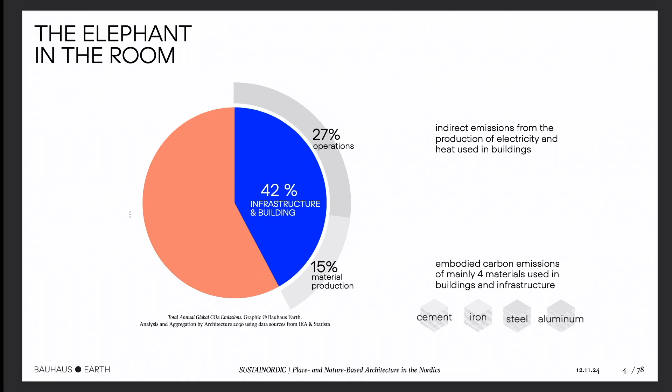We're failing to get to the desired goal, and we have this elephant in the room where we know that the built environment is responsible for a great deal of emissions, and specifically 15% of these emissions are embodied in 4 main materials used both in buildings and infrastructure: cement, iron, steel, aluminum.

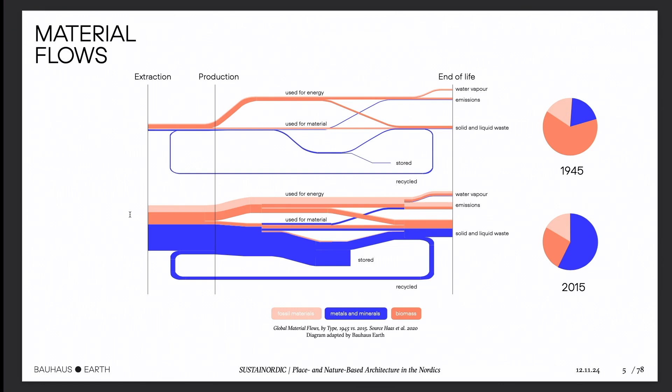We also talked about this before, how in the last 70 years, through this process of the great acceleration, we have shifted our material flows from biomass-based to metals and mineral-based. And so we have not only exacerbated the consumption, but also changed where these materials are coming from.

And if we move a bit backwards, then we realize that our built environment is just a piece of our history within the time that Homo sapiens have been inhabiting the world. And even Homo sapiens is nothing compared to all the time that the first humans lived here. And human existence is minuscule when we look at it in the grand scheme of things, understanding when the materials that we are currently using were actually created by the Earth.

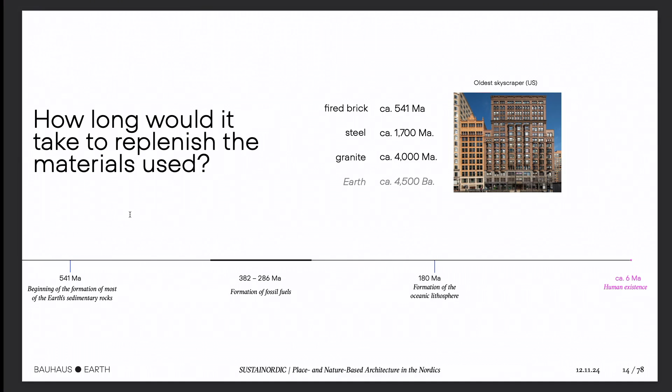And as was also mentioned before, the formation of the oceanic lithosphere or fossil fuels or all these sedimentary rocks that we use mostly in cement took 500 million years. So if I ask you again, is this building old? How long do you think it will take to replenish the materials used here? Well, at least 500 million years, but also the granite, it will take 4,000.

So what we're doing here is tapping into slow carbon cycles, and these carbon cycles take too long for us to even grasp how long that is. We're talking about steel, concrete, or plastics that, yes, of course, we treat as long-lasting and durable materials, but actually the life expectancy of these materials in our current built environment is very low. And the potential for recycling is very limited because of their energy-intensive process.

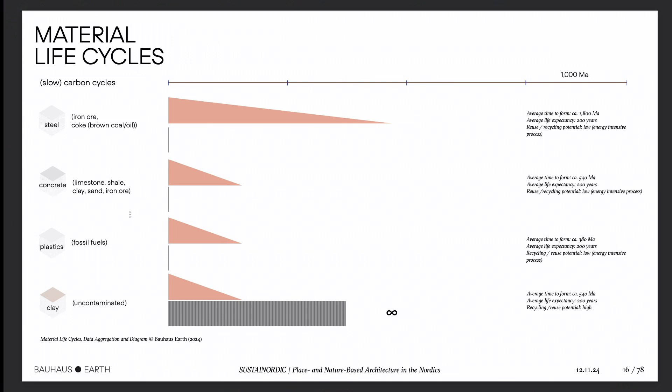And to this I add clay as a separate point because, as we have also mentioned before, as long as it's not fired and it's uncontaminated, the potential for reuse is practically infinite. So again, we look at these things and they say, okay, these are durable materials, this is why we have been shifting towards this use.

Why? Because we build for ourselves based on our human perception and our needs, and our needs change, and our built environment needs to evolve with us, and that might not change, but we are able to change the way we build.

So this is our vision at Bauhaus Earth. As I was mentioning before, founded by Hans Joachim Schellnhuber, it obviously resonates to you through the Staatliches historic Bauhaus School of Design, where practitioners, teachers, students of various disciplines came together, and they were bringing these radical methodologies of thinking through making, and they were exploring how to bring design to manufacturing post-First World War. So, of course, we take this radical approach, but we now commit ourselves to also address the negative legacy that came out of this historic Bauhaus, which is modernism.

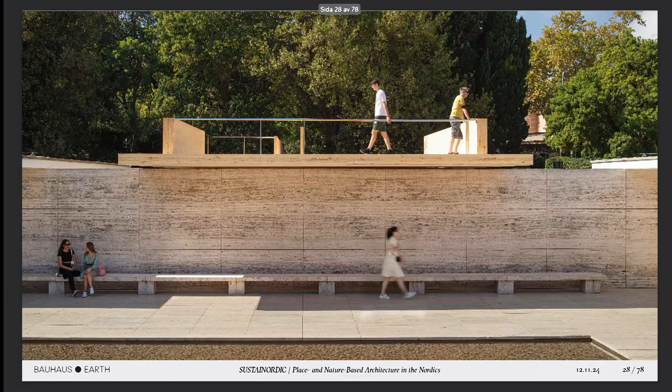We had the opportunity to work with IAAC and with the Mies van der Rohe Foundation, where we collaborated in this temporary intervention of a timber pavilion in the premises of the Mies van der Rohe Pavilion. And we addressed this from the question of what would be the climate impact of building the Barcelona pavilion anew as it was designed versus building it again with local timber. So of course the actual pavilion that was built was just a provocation, but we had a whole exhibition around it trying to answer this question.

And to this we ran an LCA analysis where we broke down both pavilions in different elements that could be comparable, and we tracked the emissions but also the kilometers that the materials used in these elements had to travel to get to the place. And then we made this comparison, and of course we realized that the timber pavilion that was actually built with local timber grown in the north of Spain had a lower climate impact than building the pavilion as it was designed by Mies van der Rohe and also rebuilt in 1986.

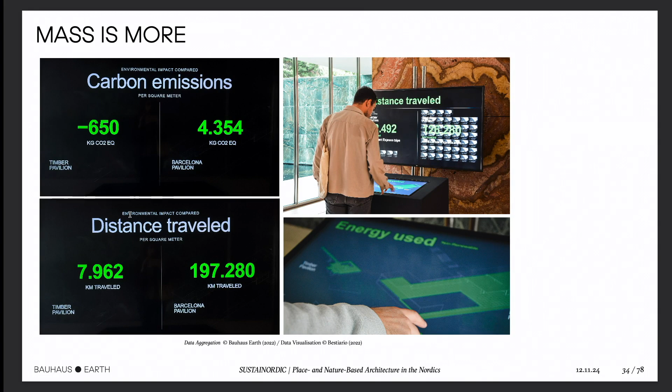But this was not the whole thing. Of course, what do we do with this data? We need to communicate it, because in the end, we need to create this outreach and make other people aware of this. So we collaborated with an agency called Bestiario, who did this lovely data visualization application where people could understand these numbers in a more graspable way. But we also designed these material tags, as we call them, similar to the nutrition tags that you find on food, trying to make the invisible visible. And we very subtly pasted them on every element and building component that was analyzed, so people could just lean towards it and understand the climate impact behind the material that they were looking at.

But not only this, it was also an excuse to launch what we call the Barcelona Protocol, which is a localized vision of our Towards the Re-entanglement, a charter for the city and the earth. I think you can find one of the copies of this, our manifesto, on the table. And we launched this as a localized vision for achieving a regenerative built environment.

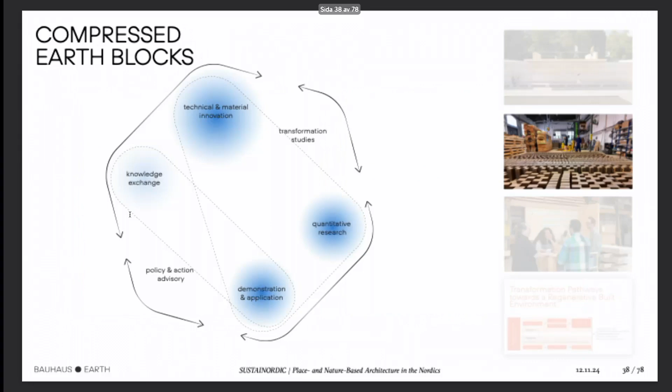Then the second project is compressed earth blocks, because not everything is timber. And in this case, we work locally, addressing the region of Berlin-Brandenburg. Two of our researchers had a previous life experience working with clay in West Africa. They are German, but they were at some point in life based there. And when they were back in Germany doing their master thesis, they thought, okay, what about knowledge transfer? Why don't we bring what we have learned there here? And this was very well paired with the DIN standard that was recently adjusted, actually. So they said, okay, let's do this, but let's make it a bit different.

Let's not take virgin material, but rather tap into waste streams to really see the city as a resource. So they did that. They started with 11 different points, and they tried excavation material, then material from demolition, from old, 100-year-old houses that were built in clay back in the days and then demolished, and also clay as a byproduct from sand mines.

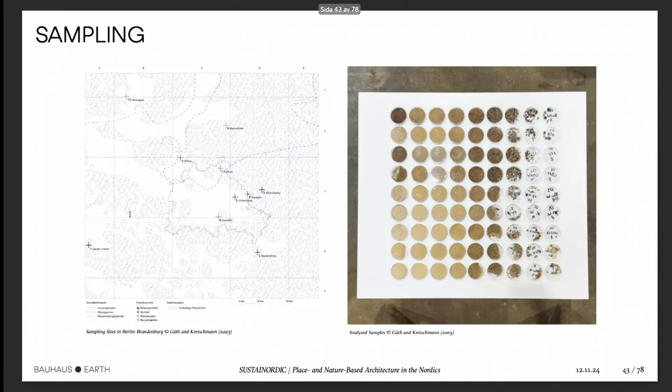After testing, they created this geological framework to first locate where these sites could be found. They conducted these soil surveys that I mentioned before. And then they started to do this sampling from the 11 different sites. So they follow all the protocols established in the DIN. And they found the optimal grain distribution. And through this process, they chose the winning soil sample, let's say.

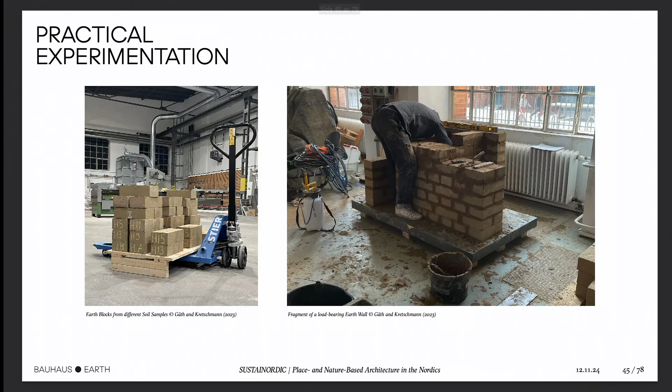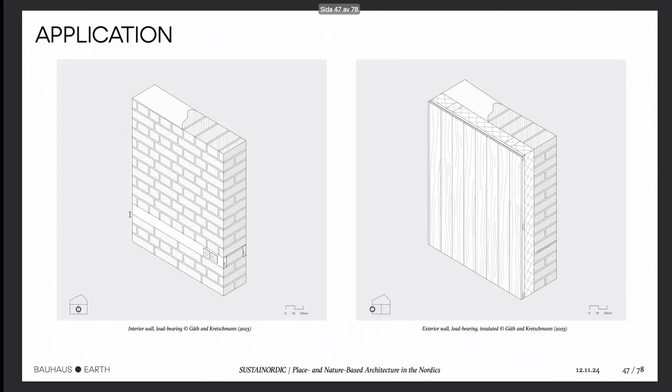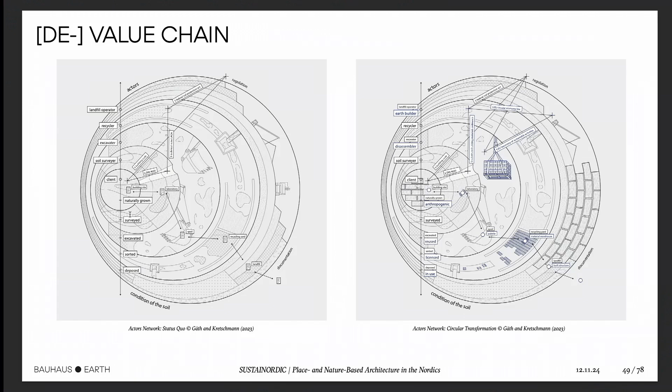And they started the practical implementation of creating these compressed bricks. They conducted all this evaluation, and they came up with some practical implementation ideas. And they managed to license this brick as load bearing. But then the next steps, of course, are going into the value chain, because at the moment, as Jason Moore mentions it, we are relying on cheap nature, cheap energy and cheap labor. And we need to move towards a more circular and transformative holistic view.

They quantified also the amount of excavation material that they could have. And of course, diversify into mortar, as was mentioned before, to make it fully circular. There is the demonstration pavilion, also a communication effort that will be published at the end of this year. And they are currently a nominated project for the Bundespreis Ecodesign.

Then comes the fellowship program, because we also want to have a more global impact, a collaboration between Experimental and Bauhaus Earth, with a jury looking into an open call, launched yearly, looking at potential designers and architects who apply with a project, because this is a project-based fellowship. We're looking for a very close collaboration with the fellows, trying to redefine aesthetic expression, but also promoting sustainable construction practices and bringing together different actors that could help us change the way we build.

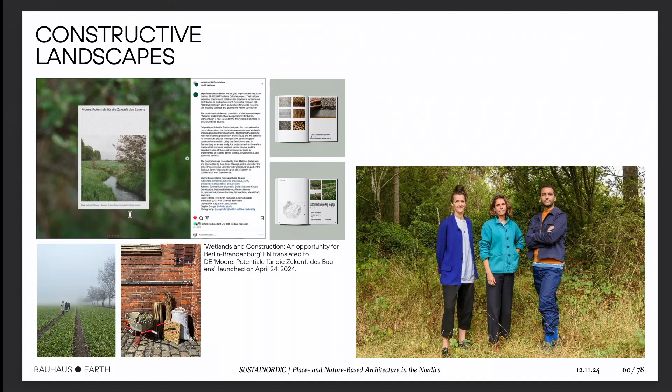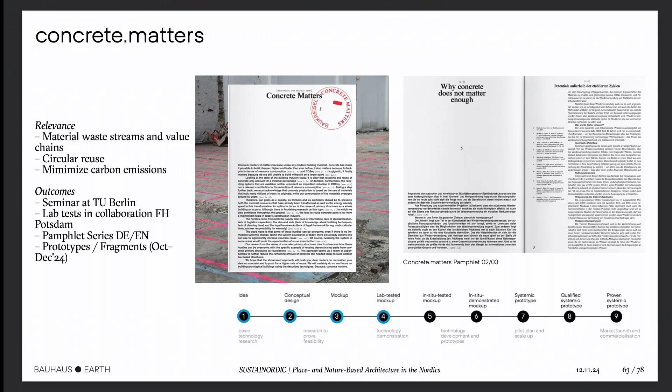And maybe you know them, Material Cultures, they were our first fellows, and I also brought the report of the wetlands. And these were some of the results. There were some fragments made with regional materials from peatlands. We're currently working with Baukreisel, a German collective, looking at the best case scenario for reuse of in-situ cast concrete when it is absolutely necessary to demolish a building and not before. And also with Angie and Heidi, who are from Argentina, working with waste from seashells and alginate.

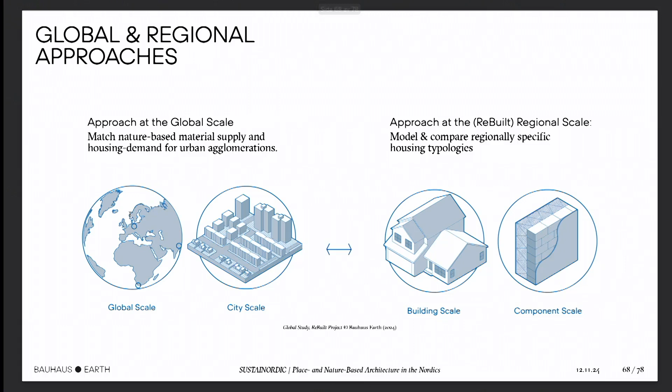And last but not least, Transformation Pathways is a project that looks a bit broader, because we know that global scenarios project that the cities with more than 5 million inhabitants will definitely be in the global south, and very soon. So we're looking at a project where we put together the global scale with the regional scale. We try to match the material supply globally with the local demand. We have 4 regions. The first one is Berlin-Brandenburg, of course, but then we have Paro and Thimphu, Bhutan, Denpasar, Indonesia, and Cape Town, South Africa.

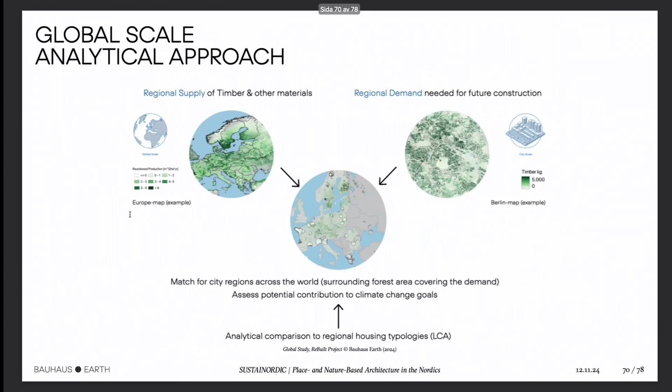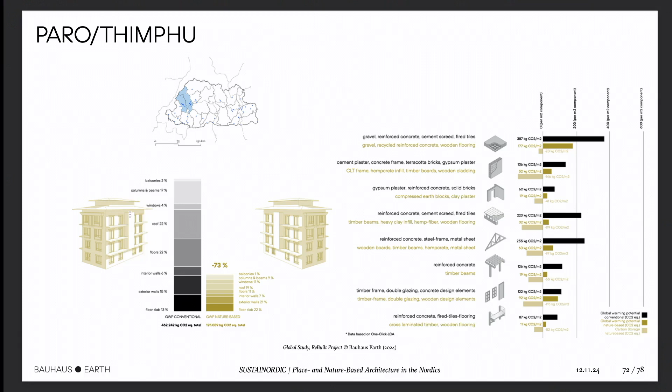And as I mentioned before, we're trying to understand what the regional supply in all of these regions is for different types of materials, to understand if it's possible to cater to the regional demand. Besides timber, which has a strong focus, we're also looking at bamboo, straw, earth, hemp. And we have created these LCA comparisons of the business as usual typology versus the one proposed in each of these regions. We have done that for all of them. The Cape Town one is still to come. But the result, of course, is that a major reduction of emissions can be achieved if changed to these materials that are proven to be locally available.

But not just that, we have also established transformation labs, because it is not a simple solution to just say, oh, let's change the materials. We need to address the local actors. We need to understand the local value chains. We need to understand the local governance, besides, of course, all the constraints within the bioregion. So we have successfully founded different groups and teams working together in them, and this is an ongoing project that hopefully will have more results a year from now.

And I just want to finish with this, because this is also something that we think is quite important. Material is heavy, knowledge is light, let it travel. Thank you.

Thank you. Very good. So can we bring Guy up again?